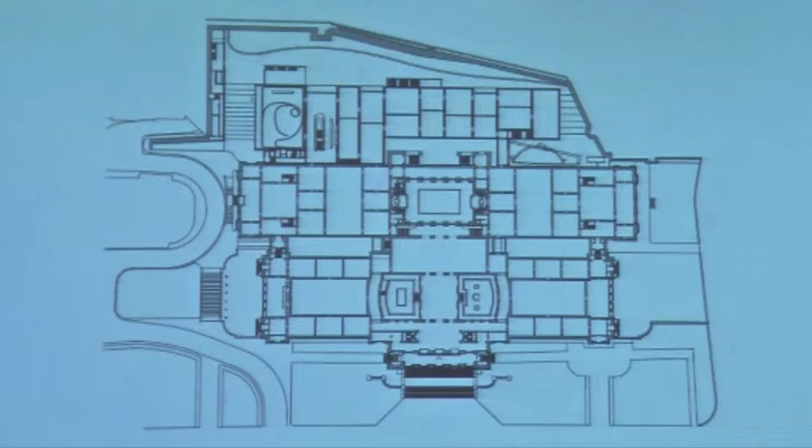By that also creating a kind of specific atmosphere like in a theater place. And there are already on one side the public listening, as a series of those sculptures. So by doing so, we of course refer to the kind of neoclassic sculpture that one cannot see on this elevation.

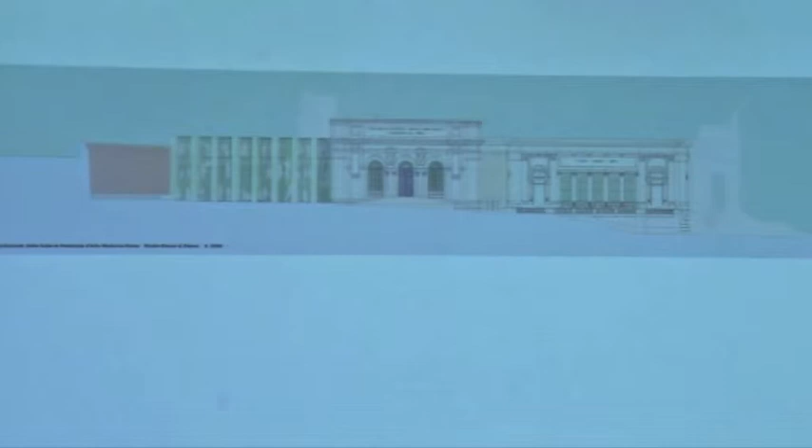But which is very present in the existing buildings from 1911 and 1933. One other aspect is that we suggested that the presentation of the sculptures would not be like in the exhibition space, but really in terms of a storage condition, like you have it in gypsotecas. That means one could work on them in a scientific way, or to restore, but not that they are presented in a kind of speculation as a presentation piece. So that was the small transformation we suggested for the monumental entrance of the original entrance front.

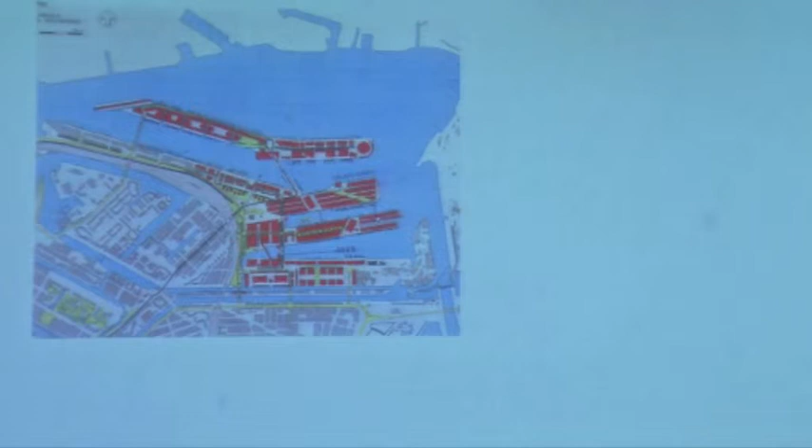And of Soeters, another urban designer, on the other wing. And this was also finally realized, and there was an issue about the entrance to that island, because there were two super blocks, one a very beautiful masterpiece of late 20th century architecture by Hans Kollhoff and Helga Timmermann. And then the discussion was about that one, and there was another small competition among 4 firms, because there was no agreement found on this former plan.

And what we suggested is to give up this kind of large-scale urbanization scheme, like maybe the reference of the Viennese blocks, but to work out just 2 houses, one which is built just on the waterfront, and the square one here as a solitary building. And they referred much more to the history of that site as a port area, an industrial area.

And we also were trying to refer with our floor plans to that, on one way, to the relation, this kind of exchange of goods that had happened between the water and the island, and then also with this kind of square building cantilevered that reminded more of morphologies of port buildings, storage buildings, that organized the way goods were then distributed from the port area to the city.

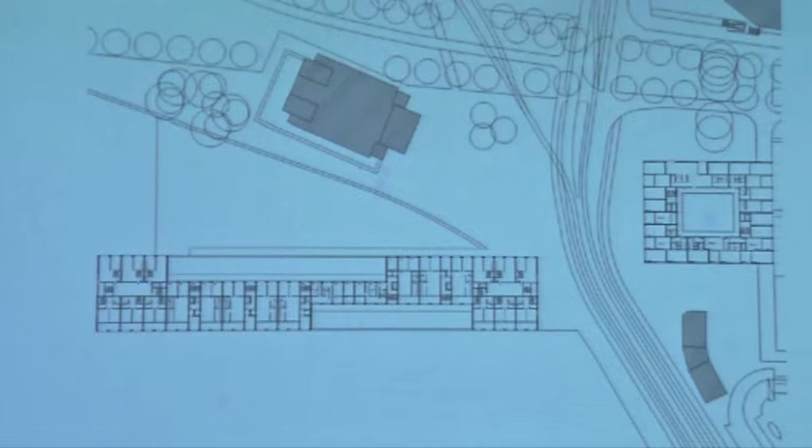We believe that first of all one has to work with the identity of the space, and we would rather build up the vision of the sheer geometrical conditions of an urban site, out of that connotation of heritage, to try first of all to create an interesting and appropriate design within the tradition of urban design. So this seems important to us, and this goes even further to the interior, to the organization of space.

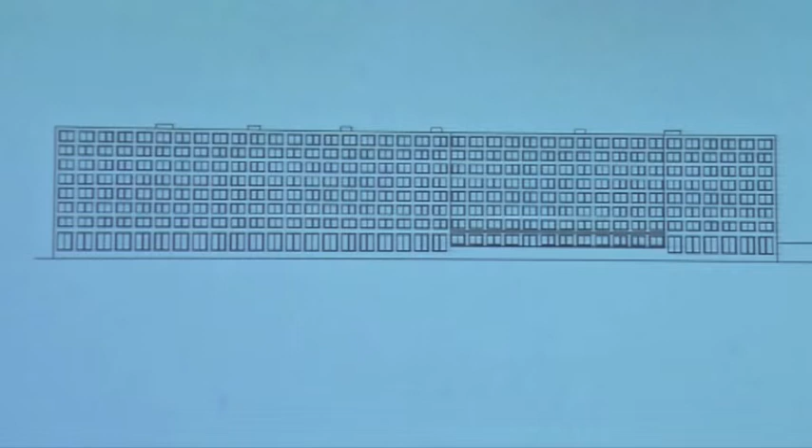Here, by the way, is this kind of expression of those 140-meter housing, where every apartment has two of those windows, and the windows are slightly shifted, half a brick. You would probably not see it or discover it with your eye, but it was important to avoid this kind of sharp geometric grid, that was not our intention at all.

Now just showing the floor plan, closer, from the second house we built up within this idea of storage houses. We organized the structure of the spaces almost like a storage space, and introduced the apartments within those spaces. That means, contrary to modern architecture housing, which very much organized typologies of apartments and then created the shape of the house out of considerations of the organization of the apartments, we did it the other way around: we built the structure first, and then filled it up.

It's a kind of balcony entrance system, and you come into a large common area, a kind of mall you share, and then there are always individual rooms. We could do so because the program asked for apartments not for families, but for people living together in short communities. So we designed this structure, and you see here the same typology.

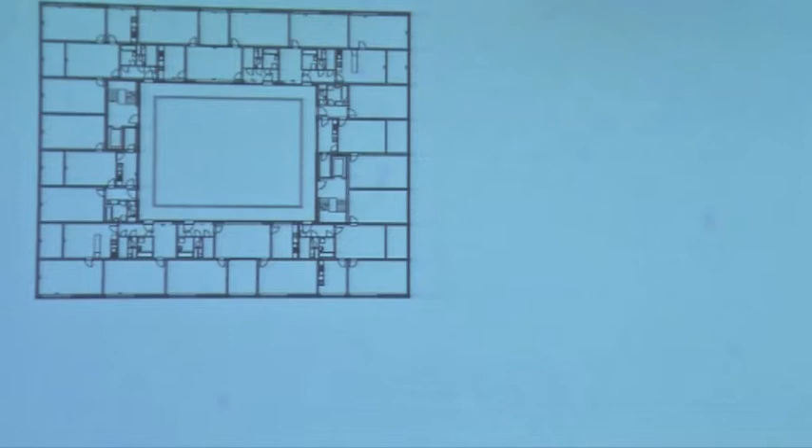Also the shape of the apartment is different. As a matter of fact, such apartments finally rather look like apartments one finds when transforming a former industrial structure, for instance. But we found them even more interesting than our own traditional shaping of apartments, which we are often doing.

Yeah, the play of the windows has to do with the structural organization of the walls.

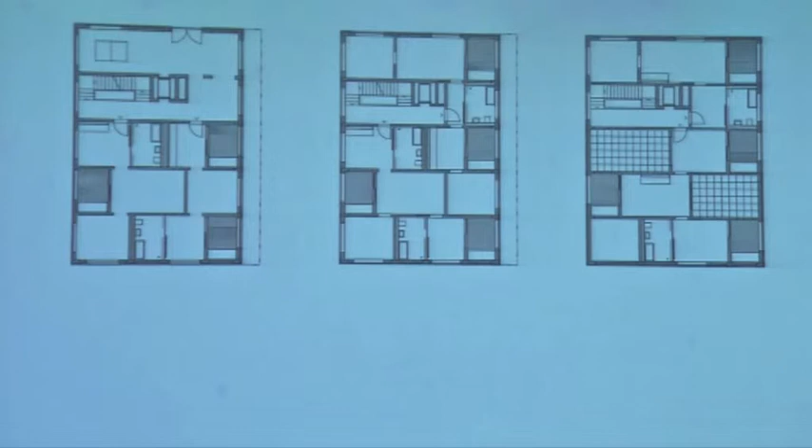This has not so much to do with our theme, but I would still mention that this idea of working within such a given structure also led to another design, one of the houses for the Olympic Village in Torino, where we exaggerated this kind of structure even more. There we reached a condition where almost the apartment itself was squatting, trying to occupy the spaces not yet occupied by the next apartment. We also suggested giving up the distinction between traditional rooms and bathrooms, for instance, which of course was also very beautiful and fitted well, since it was a house for athletes who cared about their bodies. Of course this comes close to the vision of modern architecture, which also insisted a lot on that aspect.

So you see, this was unfinished, but it was surprising all of a sudden. Of course, there became curtains, so one could feel comfortable. And this is also how that looked. In the upper floors, you might have seen before, we introduced atriums going down almost three floors.

Now this became even larger with the master plan. This idea of connotation of a certain site became more important in the larger scale of the Malmö University, which was founded in the year 2000. Surprisingly, Malmö decided to build a university in 2000, while other cities cut down their faculties. This had to do with a tremendous bad economy in Malmö, a former shipbuilding city, with around 25% unemployment in 2000. There was a very strong public will to create the infrastructure for better education of the population, and therefore, just in front of the old city and the railway station, all this area was bought to build the university. Everything had to go fast. It was a limited competition among only about 6 or 7 teams, and finally we were commissioned.

And this then, we ourselves as architects were just commissioned with the first building, in which we also wanted to introduce this kind of specific genes of an adding structure, a growing structure. It's also a very complex program organized by like 10 different faculties within one building, and that's the way it turned out to be.

To jump a last time into that, the interior is a high-end headquarters building of the Novartis firm in Basel, the very first of a campus that was designed by Vittorio Lampugnani.

What was the specific issue about it was that it was the change of the whole firm towards a concept of open space offices, about 55,000 working places around the world organized out of Basel, and this should become the very first building worked as open space, so-called open space offices. For us, it opened up the idea of creating a skin which would not point out anymore one space or one window, but to make it become one skin.

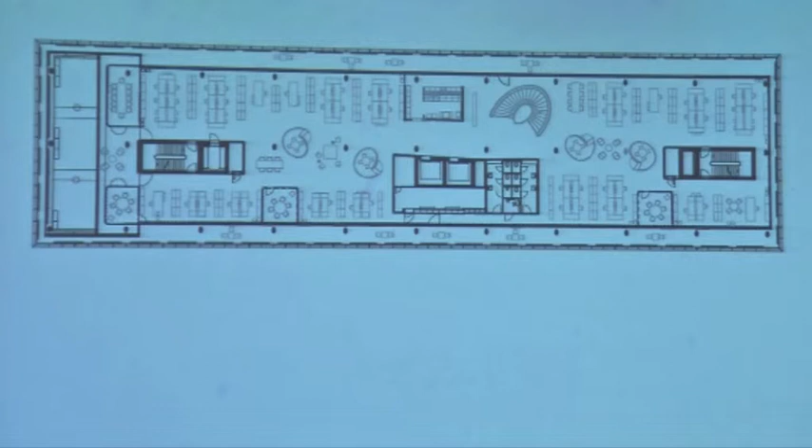And that's the way it looks like. And one idea is to keep the glass not with that abstract quality we are used to, but to use the glass as a mass. And this is really what happens.

And if you approach there, it doesn't remind you of other glass buildings. It rather reminds you of, I don't know, the Palazzo Pitti or so. It rather reminds you of a Renaissance rustico than a glass building at first sight. So those masses are so present.

Now the very last project I'll go through very quickly because it leads also to the beginning, was the extension by rebuilding the east wing of the Museum of Natural History in Berlin, which we opened at the end of 2010. It was an aisle of a building that was destroyed in the war, and there was no money during all the years in the German Democratic Republic to build this wing of the museum. Finally, the competition was held in '95, but again there was no money left until 2007 to start.

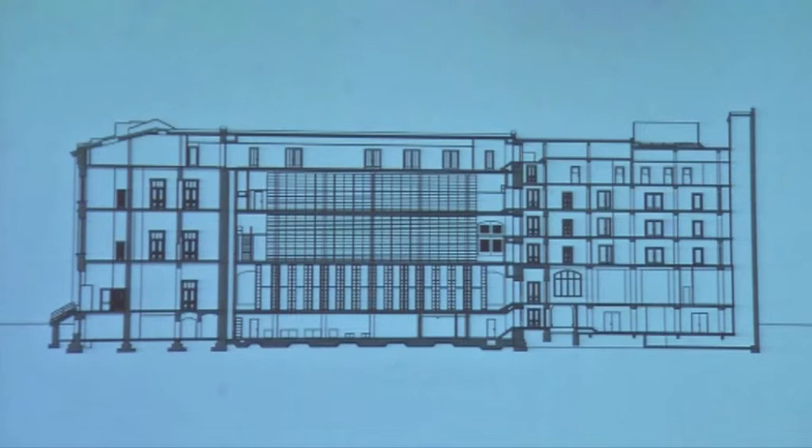We suggested that on the ground floor, people should have access, and we introduced this collection within the conditions and levels of the museum. It was like the other part of the collection, really linked and connected on all levels still for the scientific work. But on the ground floor, we reduced the width to make it possible to have a look into that collection, which is of course organized in the scientific way.

That means you would not recognize anything specific, there is no indication of any of those specimen, but it is just organized from the interior, and you might also see people working in that interior.

It's a kind of overwhelming experience to enter that space and to be in front of those dead animals. It reminds one maybe of the experience of Stillleben, because there too you have this presence, so close very often, of dead bodies, corpses, that are represented in Stillleben.

Since the walls had to be completely closed and the interior and exterior had to be rebuilt, you see here this exterior. It was decided to keep what is left from those external walls, which meant making a closed wall for the existing parts and filling up with a wall the openings of the still remaining parts.

We came to the suggestion that we would really cover it with a concrete wall, building up the non-existing walls with concrete, but we suggested to cast a surface, casting the former facade within that concrete wall with all the windows, everything left.

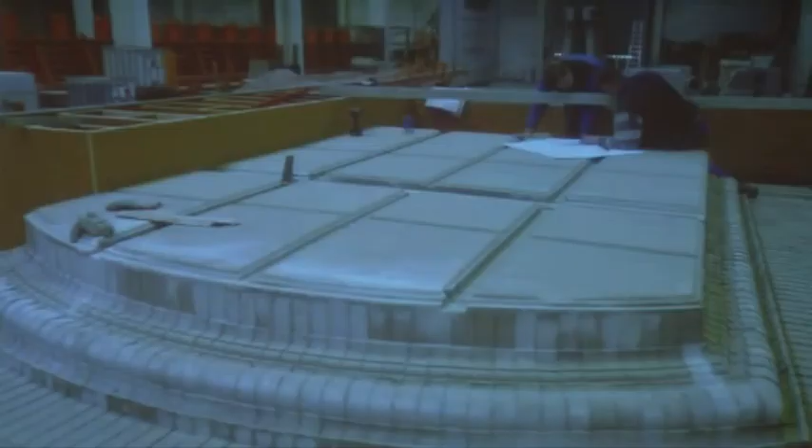We had this from the next wing. It was easy to take it away and organize it for that casting, which was of course then an ambitious work to do. There were huge elements that had to be produced, and finally you can see how that looks like in the factory, how those elements looked when they were built up.

This is then the way it looks, and it's a very surprising and strange experience, because as a matter of fact you would not immediately recognize it, but once you do, you would see that it is not built out of different elements, but is more like a petrified skin, or it might remind more of techniques of the surrealist painters, like Max Ernst with his frottage works.

This is the last reference, to say so. When we tried to convince those responsible to let it be done that way, we showed this reference: a painting by Franz Marc, Tierschicksale, from 1913, part of the collection of the Basel Kunstmuseum.

The painting was half demolished, not by fire, but by the water that should protect it from the fire. Paul Klee, a close friend of Franz Marc, completed it after the First World War. Franz Marc died during the war, and Paul Klee completed the painting, but without adding or completing it with the original colors, using much less colorful tones. This created a quality where the existing, original painting would not be compromised by the completion, but Klee still created, again, the quality of the overall composition.